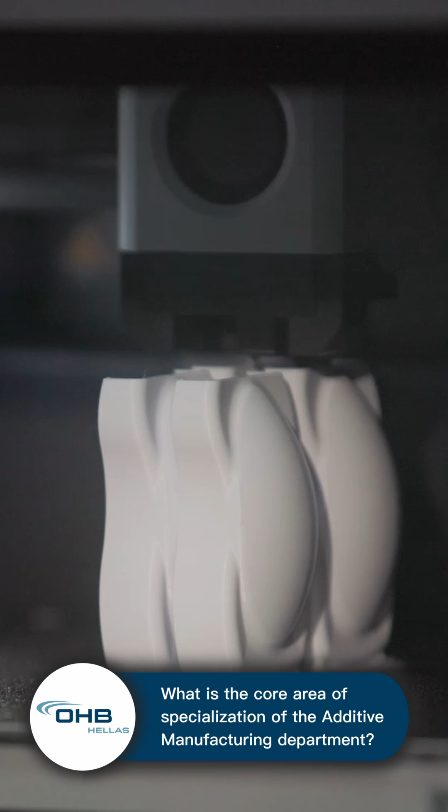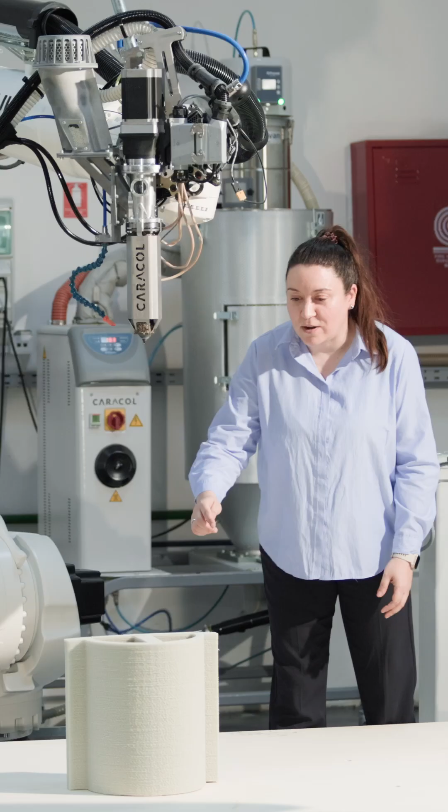The Additive Manufacturing Department prioritizes the development and optimization of polymer-based additive manufacturing technologies tailored for space and aerospace applications. Additionally, the department delivers comprehensive engineering services encompassing integrated mechanical design and manufacturing process solutions supported by robust collaborative partnerships.

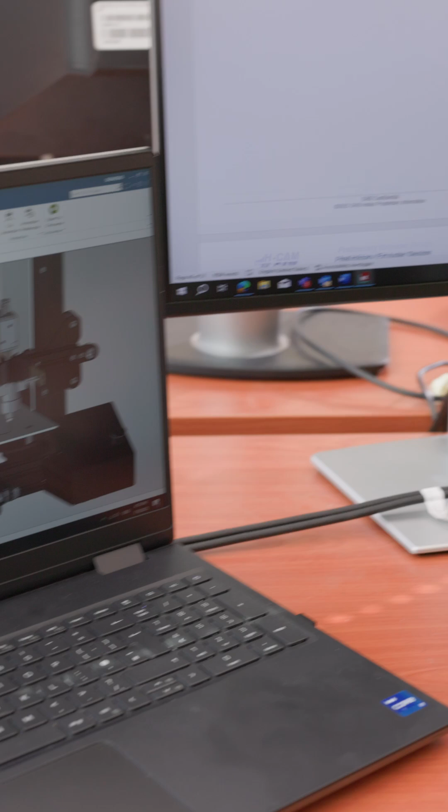We are currently developing a high-temperature 3D printing system with a customized extruder and hot end, designed for printing space-graded polymers in vacuum conditions for space applications. The main objectives are to achieve effective extrusion under vacuum conditions and efficient thermal control across the desired system.

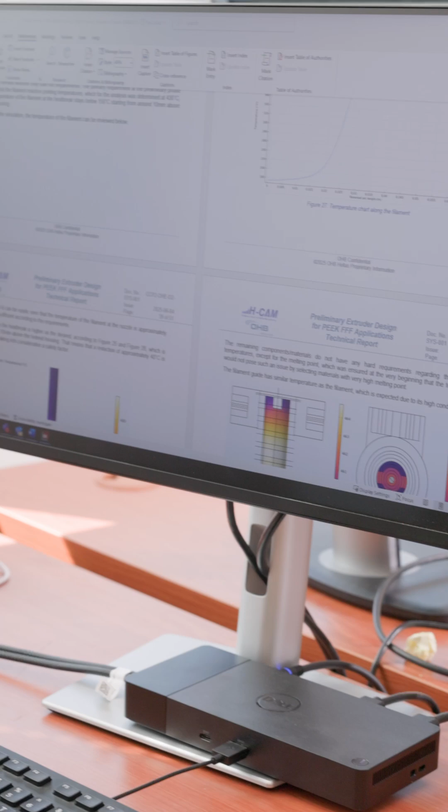As a department, we also contributed to the development and testing of two innovative selective metallization processes to functionalize polymer substrates with conductive patterns. Through this method, complex and lightweight antenna structures can be produced and adapted to the harsh space environment. In AMD, we are also working on mechanical projects for space systems.

The design and analysis of additive manufacturing components for space systems necessitate the integration of multidisciplinary engineering principles to ensure structural integrity, efficient thermal management, and reliable operation under the extreme conditions of launch and space environments. This process encompasses detailed modeling and simulation coupled with rigorous testing protocols to validate performance against stringent requirements related to mass, vibration, and safety, which are specific to space missions.

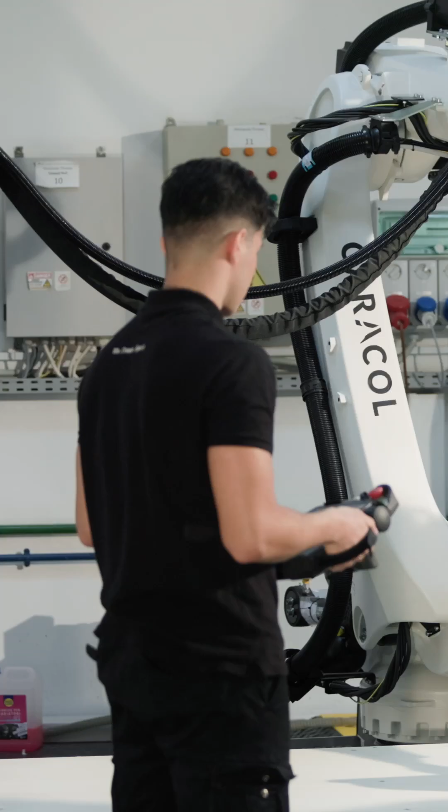The department has established strategic collaborations with industrial additive manufacturing partners to deliver optimized manufacturing and procurement solutions that rigorously comply with ECSS standards, cleanliness protocols, and product assurance criteria. Leveraging these partnerships, the department seeks to advance its technological capabilities and extend the application of space-qualified components to domains including robotics, mechanisms, and defense systems.

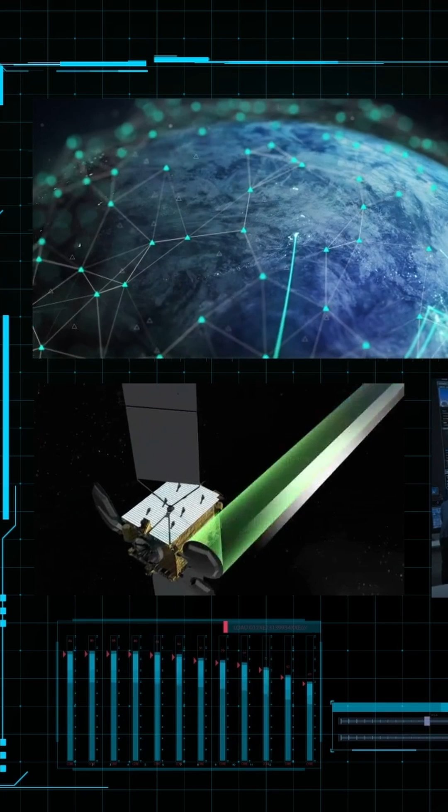Furthermore, our department supports European defense-funded projects through advanced mechanical design and system integration. Leveraging our technical background, we contribute to innovative solutions and strive for a more sustainable future for Europe.

As a mechanical engineer at OHB HELLAS, my ambition is to drive innovation, foster collaborations, and push the boundaries of space technologies to new and exciting possibilities. And I personally aspire to elevate the mechanical department's engagement in cutting-edge aerospace initiatives, aiming to have a resonant impact on the development of the Greek aerospace industry.

Great. Okay, I think we're done, guys.